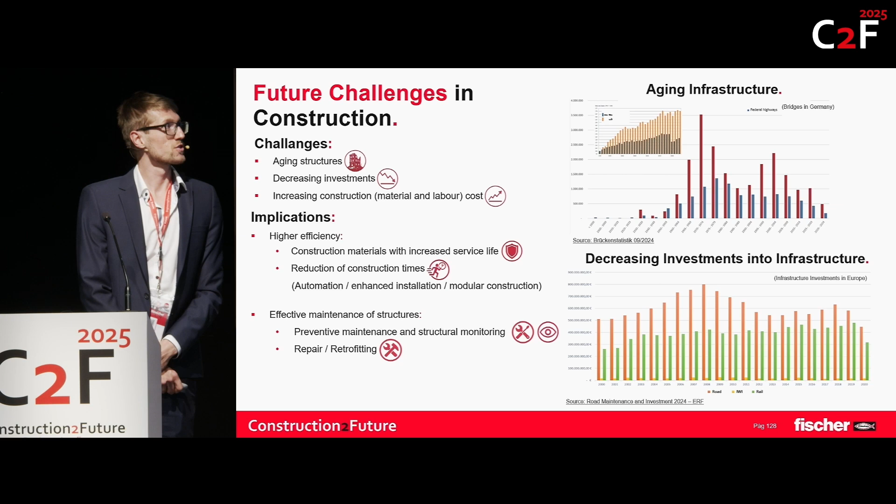So on the upper right side, you can see construction of highway bridge infrastructure in Germany. As you can see, most of the infrastructure has been built after the Second World War with the economic rise and also with the Marshall Plan, of course, fostering it. And most of it is built in the 1970s, meaning it's more than 50 years old at the moment. The topic of maintenance has become very hot in the last few years, but for decades it hasn't been. So actually, much of this infrastructure is deficient at the moment.

In the small inlay, you can see the increase in traffic loads from the 90s to today, which is at least 70%, not even talking about the increase from 1970 to today. So all those bridges back then were not designed for the traffic loads today and are currently aging. On the other hand, in the lower graph, you can see the European investments into infrastructure, and the orange bars over here are on road infrastructure. So it's actually stagnating investments into infrastructure, and if you correct that for inflation, it's actually a decrease.

Therefore, we are facing challenges in construction, which already have been mentioned to a certain extent. We have aging infrastructure, insufficient investments, and increasing labor and material cost in construction. At Fischer, as Dr. Mihala already mentioned in his talk, we try to orient ourselves at customer needs, and customer needs in the construction industry are aligned with its general challenges, which is why we require construction materials with higher durability and service life. For example, anchors certified for 100 or 125 years mean a significant cost reduction for customers if you don't have to exchange fixings at a certain point in time.

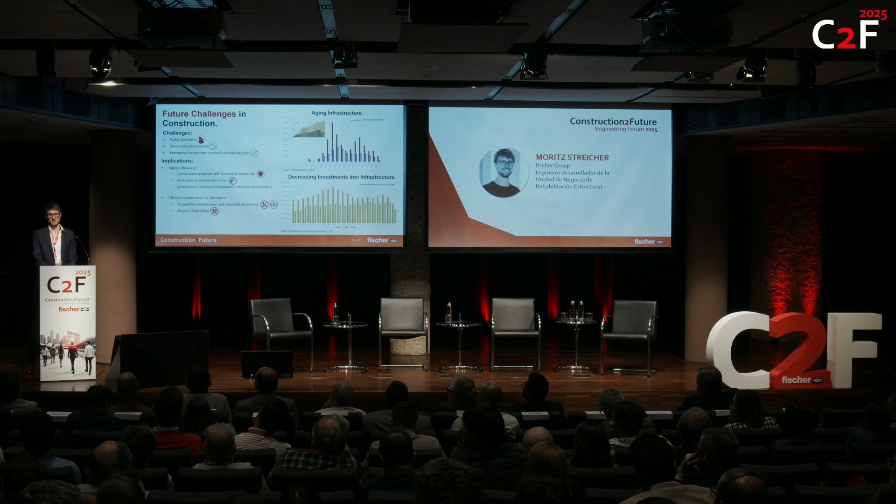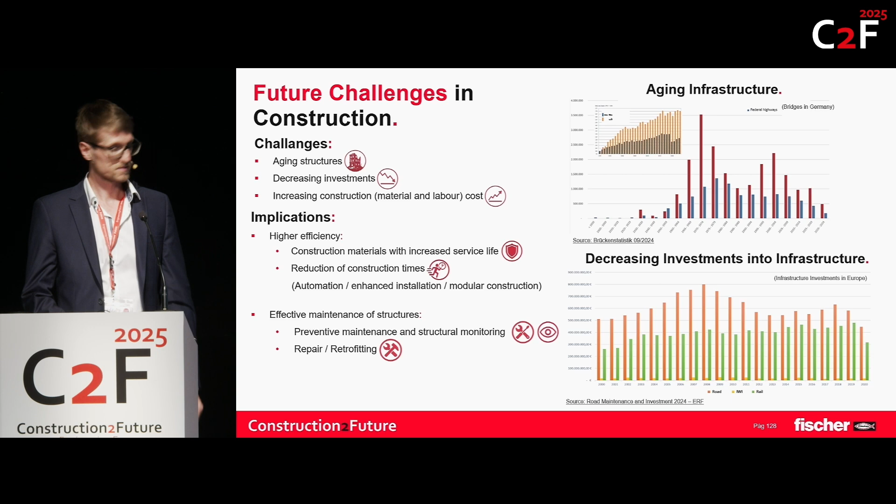Also, we have to reduce construction times, which is associated directly with Emil Kral's topic, the BauBot, in tunnel construction, for example. We also have to deliver solutions for modular and industrialized construction in order to become faster and more cost efficient. But the block I'm focusing on is effective maintenance on structures, because as Professor Bergmeister pointed out, we have pretty nice infrastructure and we need to maintain it. It's the most cost-effective way, and the easiest way there is predictive and preventive maintenance to prevent it from becoming insufficient. Which is also why connected products has become an important topic for Fischer. But once maintenance has failed, we need a toolbox to retrofit our structures, which is where our department comes into play.

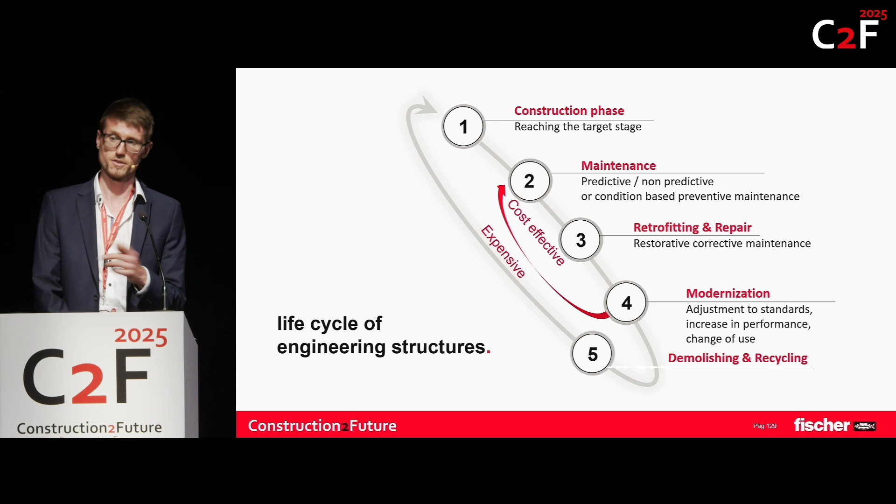If you think about the lifetime of a structure, it always starts with the construction phase. You have a use phase during which you should do the maintenance. Often the maintenance is not properly done. You have a need for retrofitting and over time for modernization. Nowadays, we still have much too much demolishing and new construction around the world, which goes along with higher cost compared to proper maintenance, even though it's a running cost. That's why many people try to avoid it, because you can shift the cost for 30 or 40 years. But in the end, it comes in more expensive. If we can cut that cycle shorter and increase the lifespan of structures through modernization and proper maintenance for a few more cycles, we actually win a lot.

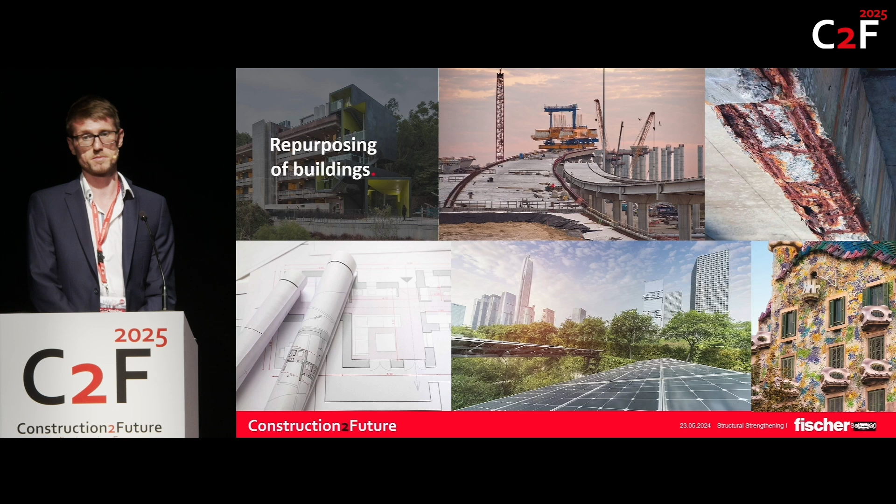There's many different reasons for retrofitting. It may not only be deterioration. We have structures that are being repurposed. For example, in Dubai, they have hospitals now becoming hotels, or parking garages becoming residential buildings. We have increasing traffic load, so you may need to strengthen bridges for higher traffic loads, or also for seismic loads.

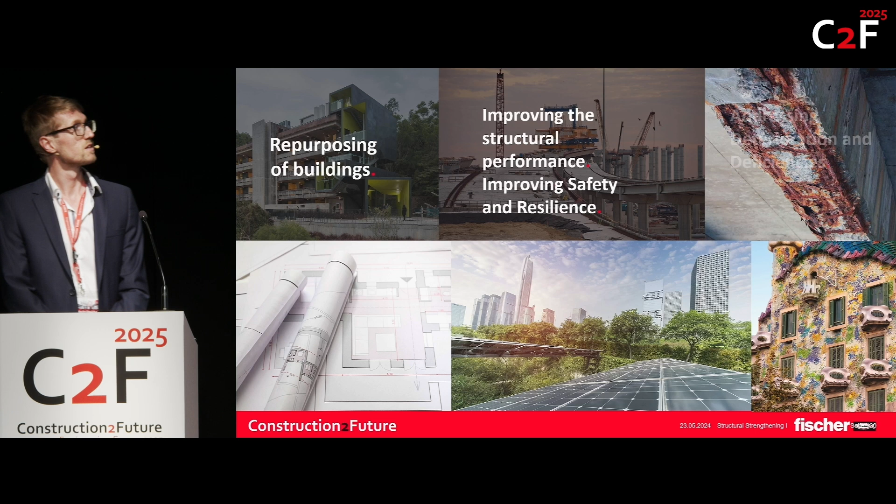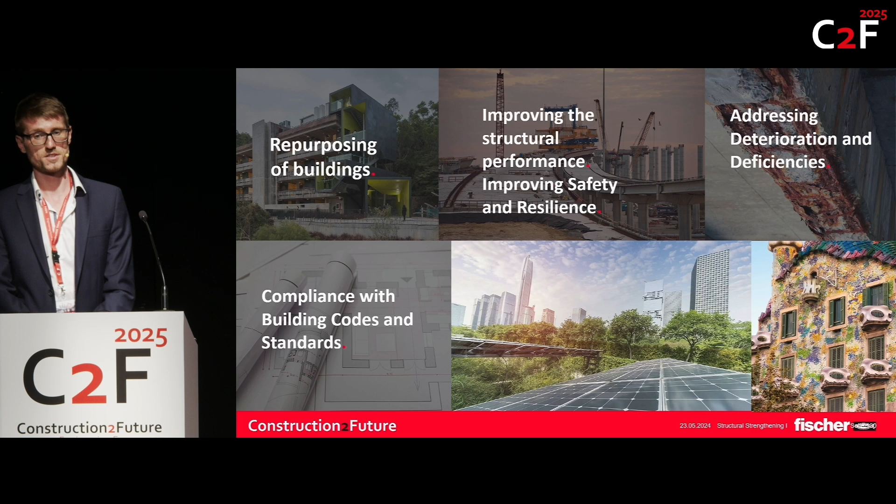We heard about the issue with corrosion. It is also very present in regions near the sea. You may need to compensate for a loss of reinforcement cross-section with additional reinforcement at a later point in time. You may have compliance issues with new changes in code, for example, restrictions in fire. Or you may have additional loads on your structure, such as heavy machinery or rooftop solar power plants, which may not have been originally accounted for in the design of the building.

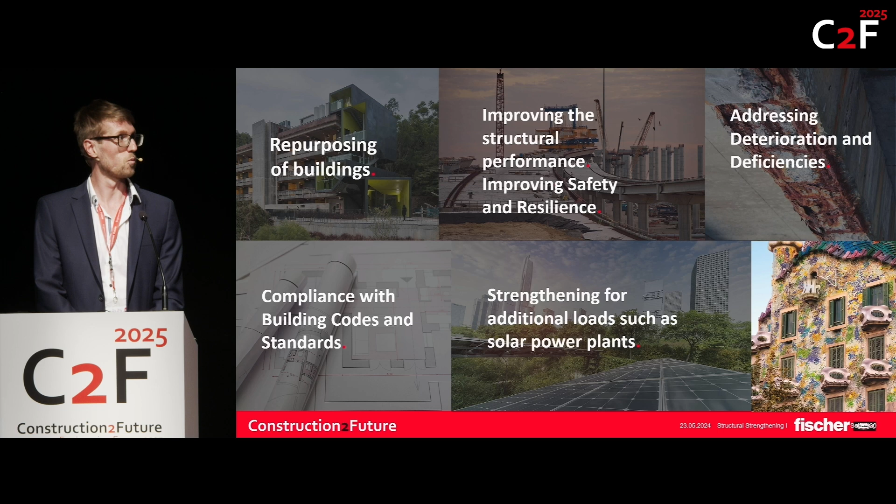And I have one example, which we found yesterday, which is rather nice, maybe the most well-renowned retrofit in Barcelona, the Casa Batlló, which was one story shorter before and got a nice new roof and facade by Antoni Gaudí.

At Fischer, we already have a portfolio for retrofitting, and I'm focusing on strengthening today, even though retrofitting covers a way larger area than just strengthening products. And I'm not even mentioning products like wooden screws that we have for shear strengthening of beams or addition of new cross-sections in wooden construction.

But since my department mostly focuses on reinforced concrete and masonry construction, Fischer already has a strong portfolio in post-installed rebar solutions, as well as shear connectors for concrete overlays, with either chemical shear connectors or concrete screws, as well as bridge cap anchors, which are sold very well in Austria, for example. And we were thinking about how to extend the portfolio to meet the market requirements as effectively as possible, which is, for example, low closure times.

If you want a parking garage to be retrofitted, most often they want to reopen in 48 hours. If you do it with concrete, you have to wait 28 days until your concrete is cured. So it needed to be fast, so we went with epoxies. It needs to be durable. We wanted to not increase the dead load of existing structures.

We didn't want to decrease the free height of structures, because otherwise, if you do it with post-installed rebar solutions, you increase the cross-section of columns and you actually lose space, which is not what we want, especially in crowded areas and cities. Which is why we came up with a portfolio of CFRP strengthening products.

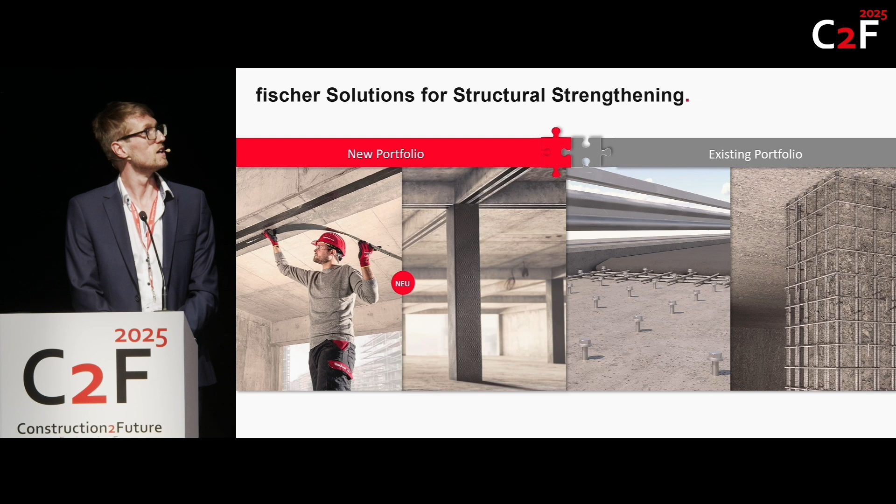And at the moment, we're able to cover a pretty good scope of strengthening applications. Especially in China, we also have a portfolio, mostly sold there but theoretically available worldwide, of externally bonded steel plates that they use for shear strengthening and flexural strengthening of beams, and jacketing of columns, which has to be protected against corrosion, which is why we also developed corrosion protection primers and coatings.

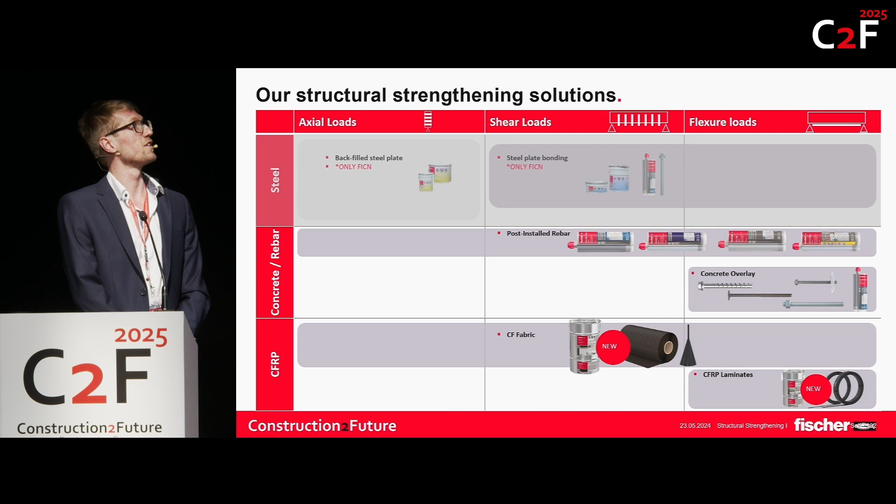And then, of course, we have the whole traditional Fischer product series that you know, concrete screws, shear connectors, anchoring solutions suitable for post-installed rebars, and now the carbon fiber portfolio. Of course, this is not comprehensive. Carbon fiber fabrics cannot only be used for wrapping columns to increase the axial capacity, but also to increase shear capacity or flexural capacity of columns, if that's the deficiency that you're having.

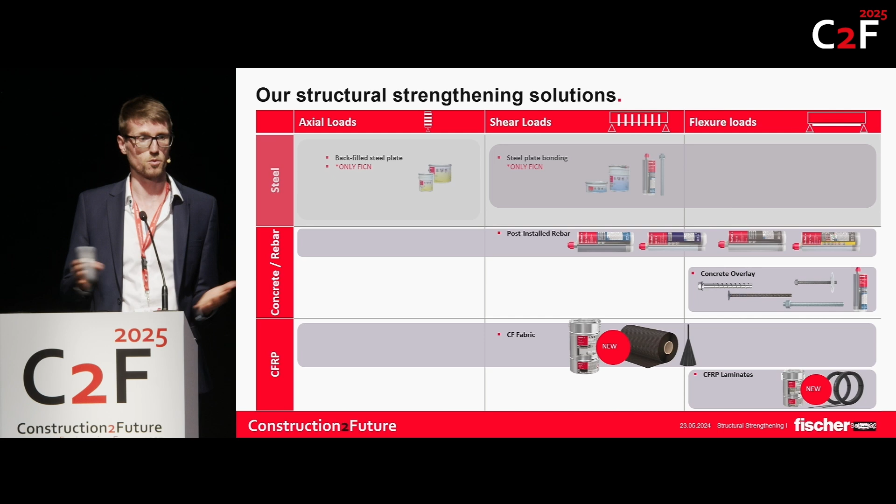What is not mentioned here is, for example, shear strengthening of diaphragms and walls that you can do with externally bonded CFRP. When we developed the products, you may know that there are already competitors out there. There's Mapei, there's Sika, there are companies on the market. So carbon fiber-based strengthening products are not entirely new to the world.

But as for all products that we develop, we put great emphasis on the customer benefits, especially for contractors. So we developed one epoxy resin which can be used for both near surface mounted and externally bonded CFRP laminates. It comes either in buckets for externally bonded application, or in cartridges for near surface mounted, with a specifically developed adapter, so you can use the normal Fischer mixing nozzles to simply inject the epoxy resin into the groove, be fast in construction, and have a clean and tidy construction site without pre-mixing epoxy resins, filling them into tube bags and then injecting them, which is a mess.

And also for the carbon fiber fabrics, we were able to make it with a single resin that can be used for priming the concrete as well as for impregnating the carbon fiber fabric, which is actually pretty nice. What's not shown here is that we also have an ultra-high strength epoxy-based repair mortar with around 150 megapascal compressive strength.

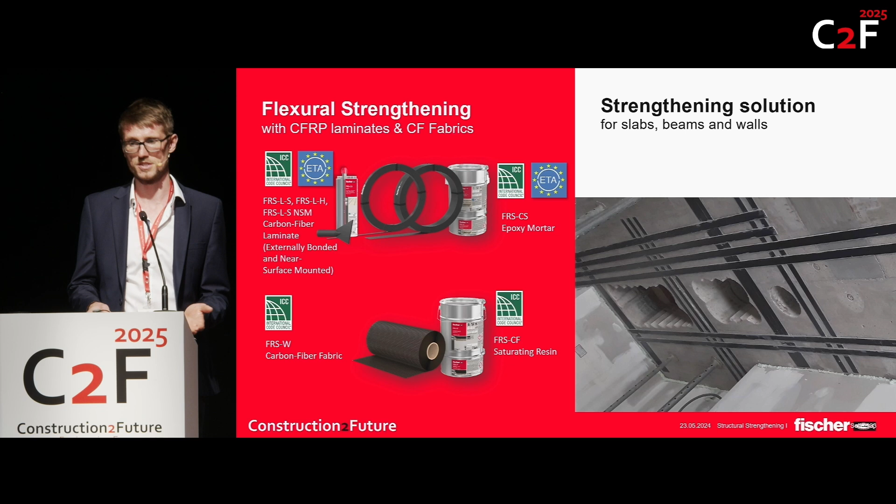So it's an R4 repair mortar that can be well used for retrofitting projects, because in many applications you don't just have a structure that is deficient in terms of lacking reinforcements, but also you will have concrete spallings or something else that you may repair. You may need to reprofile a cross-section, and if you do that with a normal cementitious repair mortar, of course you're cheaper, but you'll have to wait 28 days until you can load the structure. If you want to do it in 2 days, you use an epoxy mortar and you're very fast.

And since, as I said, we put emphasis on customer benefits, we also developed a series of application aids, such as a laminate coiler to uncoil the large 150 or 100 meter CFRP coils to cut them to length rather easily. And mortar application tools in order to ensure that you have the same amount of resin and the same profile of resin on the CFRP laminates at all times, to keep the construction site tidy and, again, to be quick.

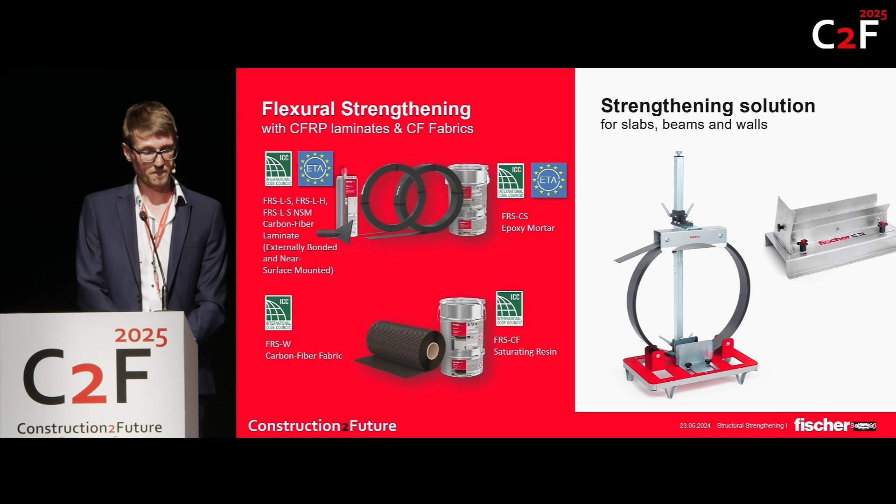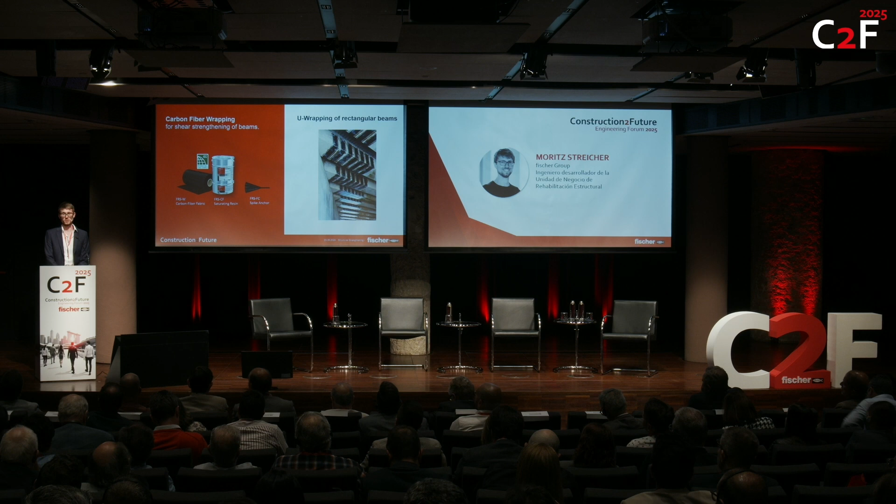When we look at fabrics, we have some more applications than just flexural strengthening, which was mentioned on the last slide. You can also have shear strengthening, as I mentioned before. Here we have another product involved, which is coming at the moment. It's called a spike anchor, basically a single cured, single uncured end anchor. There are also completely uncured anchors, which are again a mess in installation. They can be used to end anchor the fabric. Basically the idea is that you bond the pre-cured part into a drill hole with our FIS EM Plus epoxy mortar, for example, and with the open end you can laminate on the fabric in order to prevent debonding, which gives you a larger scope of applications.

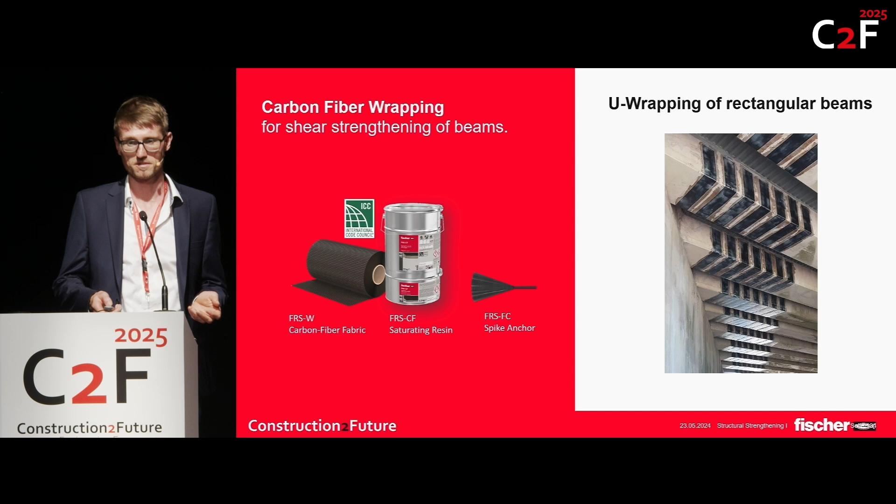You can have concave shapes that you can retrofit with the fabrics with this technology, and also you can have end anchorage of fabrics in shear strengthening, because I think Professor Bergmeister said you have to close the load loop. He was referring to another bridge structure, but that's what he meant, and it's one suitable solution which is also more convenient in application than most products on the market. And what's funny here, because we were in the Gaudí building yesterday, corners for shear strengthening or column wrapping always have to be rounded. So in a Gaudí building, you wouldn't have to round corners because there are no 90 degree angles anyways. And you can use the same product also for column wrapping, as I mentioned before.

Just to sum up one more point, we've been talking about digitalization a lot, and we have the beautiful Fixperience products from Fischer. It's a whole series, also for anchor channels, etc. Those modules work rather conveniently and make planners' lives rather easy, because they give you the full-scale calculation of your anchored solutions. And there's also a plugin called Reinforce Fix for our solutions, where you can dimension different beams and slabs and other members according to the most common guidelines on the market, and get full-scale printouts in order to have easier calculation methods at hand for the structural design. And we also have engineers at Fischer that can aid you in case you have a project that requires more engineering judgment, because some single cases are rather difficult.

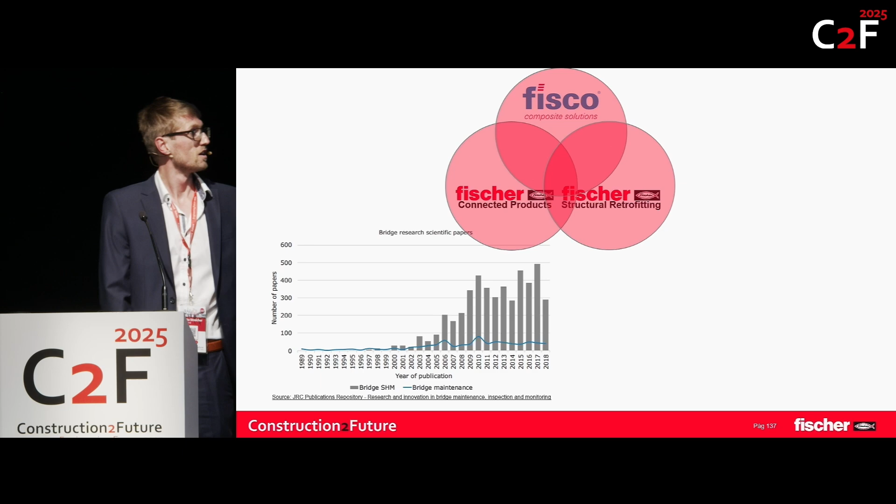I just want to sum up with one point that I didn't know if I wanted to show or not, but since I'm between Günter Hirt and Martin Neumann, I found it funny, because we are always talking about our fields, but at Fischer sometimes we join expertise from different departments. We had one research project where Fisco, Connected Products, and we collaborated on a project that faced another demand that was talked about a lot. That's publications on structural health monitoring of bridges. You can see that since the 2000s it has risen a lot. So there's an academic and also an industrial interest, as we heard today.